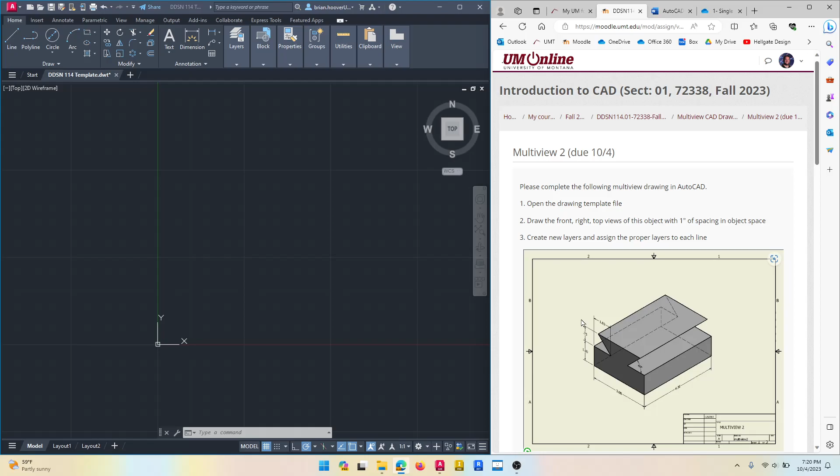Hi everyone, got Multiview 2 for you here.

I'm on the template. I'm going to click over to Model, start with my object layer, and then what I'm going to do is start my line at 0, tab 0, hit enter. I'm drawing it from the origin, and I'm going to start with my front view, which is over here. So 3 enter, and then go up 1, come in 1.

I'm going to draw my 45-degree line. In this part, it doesn't say how long our angle is, so I'm just going to go like 3 tab 45. I just want a long line like that. It's mirrored, so I'm going to grab my 3 lines, click mirror, and then I'm going to click my midpoint, and then move it up, and click a second point above to draw my mirror line. I'm going to say no to erase my source objects.

Now what I can do is offset this bottom line right here up 1.75 inches. Click my line, go up, and then where it hits this 45-degree angle, that's where they intersect. So I just TR, enter, enter for trim. I can get rid of those. I've got my front view.

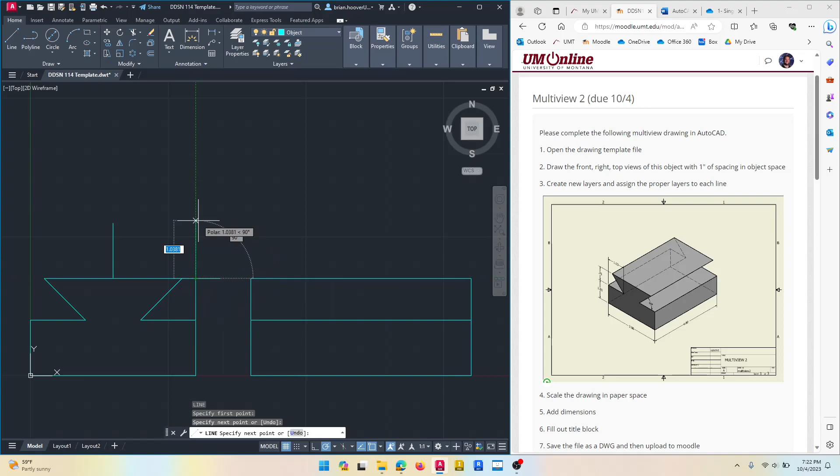So from here, I'm going to go up from the midpoint up an inch, because if I go from here up an inch, that doesn't give me 1 inch of space. And if I go from here, it's kind of weird. So I like to go on stuff like this where I can't get this top corner. I can go up 1 inch. You can also go find that point and then go up 1 inch. That also gets you the same point. So we're up 1 inch. Part is 3, so I'm going to go 1.5 to the left.

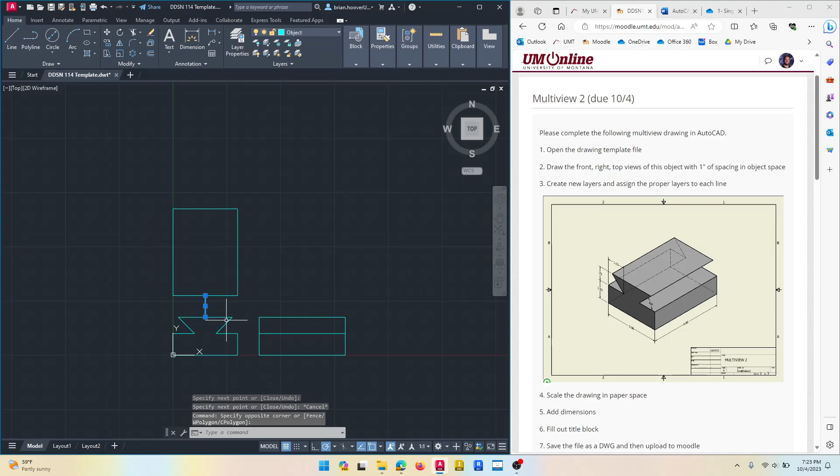4, 3, 4, 3. I'm going to project up my top 2 lines. So I've got that top surface that I need to draw. So right here, I've got to draw that surface here. And then I've got these edges here. So where these 2 planes meet, I have 2 hidden lines. That's the next step, is hidden layer, and then drawing those 2 hidden lines. There to there, there to there. Delete that. And that's it.

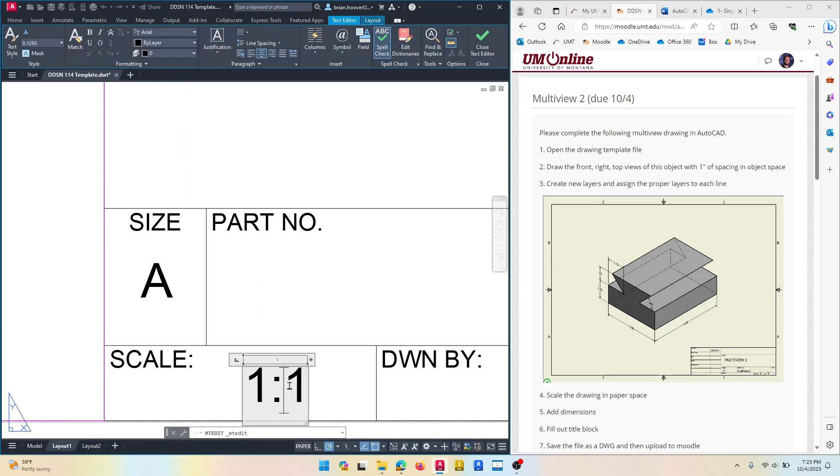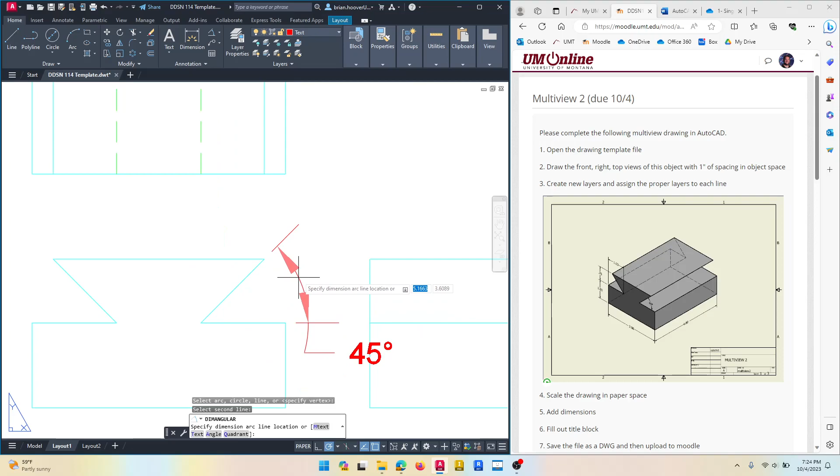So back to layout 1. It's not going to fit 1 to 1, so I've got to go 1 to 2. I'm going to center that. Make sure you adjust your scale. Also, when I go 1 to 2, I typically do the LT scale and type in 0.5 to get my 0.5 line type scale. Text layer. All my dimensions are going to go on the text layer. I'll start with this 45. See how I'm kind of cramped for size and room here for my dimensions?

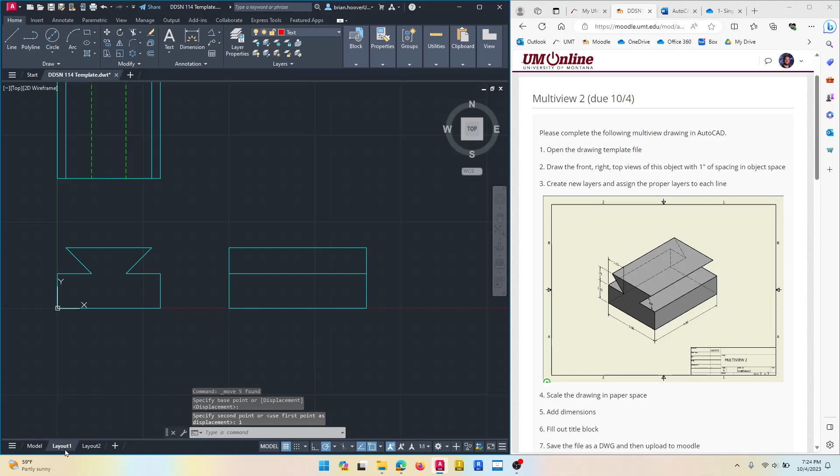What I can do is select each view, click move, click on my view, move it the direction I want it to go, type in 1, hit enter. That moves it 1 inch that direction. So I select my view, click move. I like to click on a corner. It doesn't matter where you click, but if I click on this corner, then I can move it over, and it's easier for me to see that I'm essentially drawing a line that's 1 inch. So type in 1, hit enter. It moves it over another inch. So now I've got 2 inches of spacing, which is still okay for this part.

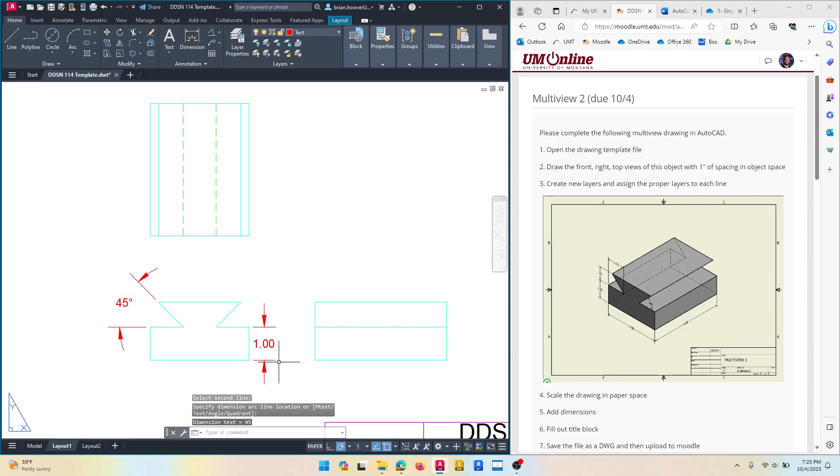Back to linear. Add that dimension. This, I'll actually switch this. I like this better over here. I'll say linear, 1 inch here to here. And then angular, I'll add that over here. Don't really have room to add that 1 inch there. So I could go with these two. I could do this, or have the 1.75 and the 1. I could do that. I can also put this over here like that. I kind of like having them like that. That looks a little bit better.

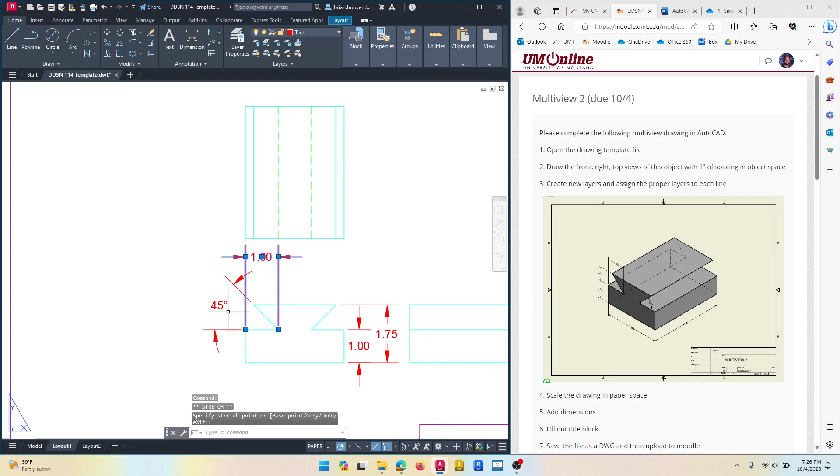I've got that 1 inch. Don't do this. Don't dimension to the hidden line. So don't do that. It's much better if you add it right here and then cross them, or add it here, here. And I can maybe pull this out a little bit. Move that a little bit closer. You could do that too. It would also be acceptable to go down here like that. The key is you don't want a dimension to a hidden line.

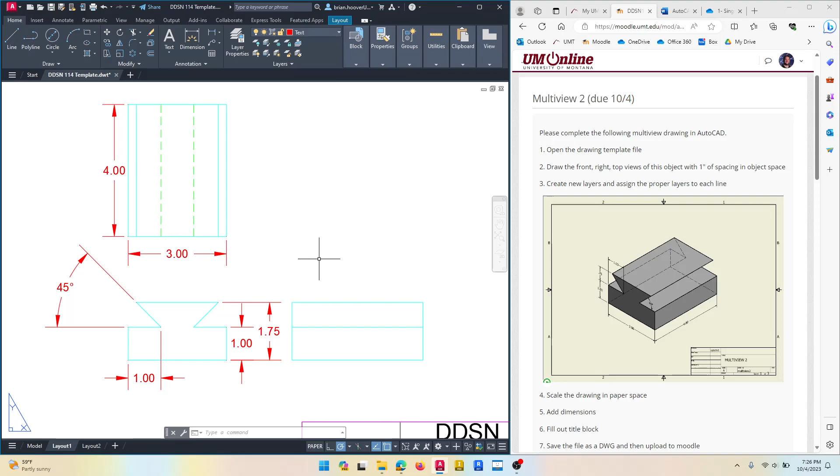The last dimension, or last two, add my length. I can also add this 3 right here. And I think that's it. So same thing as before. Fill out the title block, save the file as multiview2_your name, and submit to Moodle.